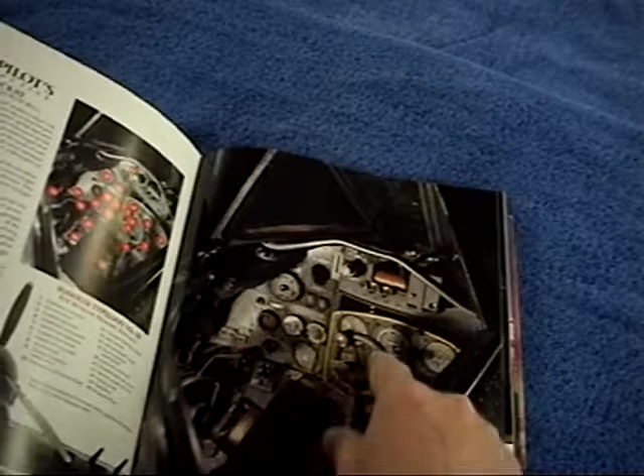The thing that makes modeling fun is knowing that you can do some of this stuff. And here it's telling you what every instrument is, where it is and what it does - a Mosquito, Beaufighter. We did that thing on a Beaufighter not long ago.

The more of this you can see, what I really like is when they'll give you the instruments if you really want to go that extra level, like you're building a scale plane. But we're not, and so we're pretty free.

Here's a Spitfire. Now that's what a war Spitfire looks like, and we'll be able to replicate that pretty simply. It won't be real difficult. Almost everything on here is something we'll be able to get pretty close to.

And notice, in this one, it's not painted blue - it's zinc chromate. So before you can really go ahead and do much, or really do anything, you really have to know what the real item looks like before you can make a model of it, no matter what it is. Knowing what the real thing looks like is always a big step toward getting something that's pretty accurate. And this book really helps.

This is a great book. Now, just another thing, if you notice, this book is pretty well dog-eared and beat up, and it's not a brand new pretty book. Like my tools, in fact, this part's starting to get deteriorated. I'm going to have to get some tape on that.

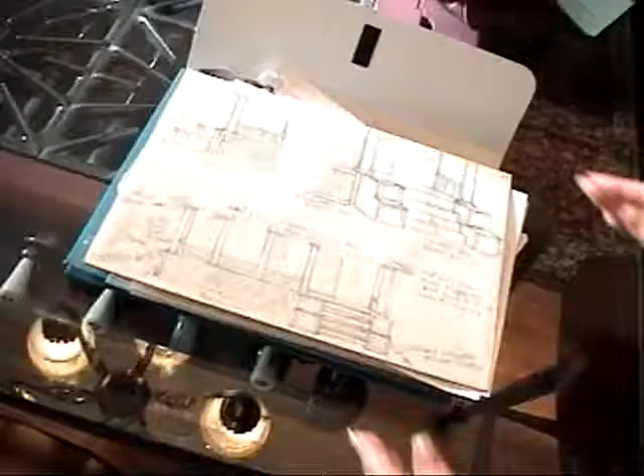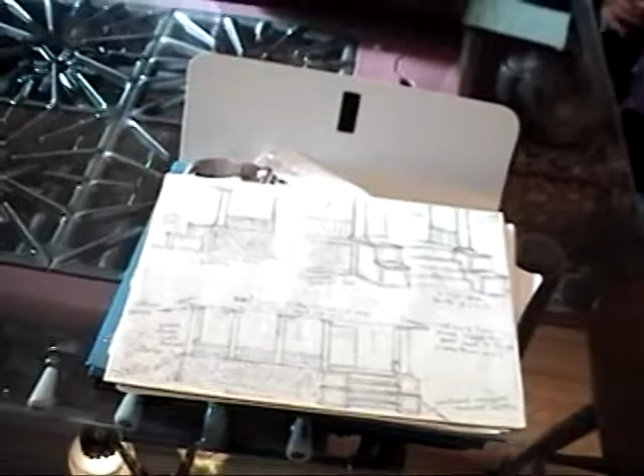The next part of our adventure, we have our neighbor who drew us a sketch of a porch in an attempt, as she remembers it as a girl, but the building inspector in town requires us to have a photograph of the house when it had a porch. And Karen, what did they do today? She called the museum, and the museum has a photo of our house when it had a porch, and she's so happy. We have company, Jay and Will over here.

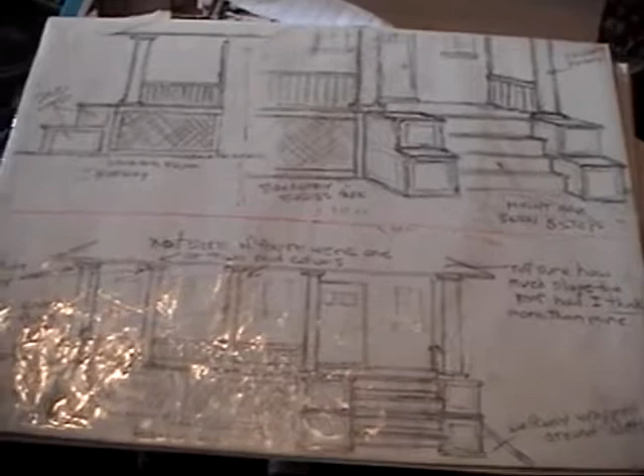We're running out to get a picture of the porch. Is that unbelievable? A moment in stunt history. They have a picture of our house, which is 100 years old, when it had a porch. And we're going to go to the museum and get a copy.

So here we are right in our own town. I never even knew that this existed. This is the Meadowlands Museum. And we're going to go see if we have a picture of our house with the porch on it, which will pretty much grandfather us in and allow us to bypass the variance, save about $2,000 that way.

Look at this sign, you believe this? Pretty cool. I'm excited, we're excited, this makes Karen's day complete. And don't tell her I really wish I was home working on my canopy detail, but this really is an old house.

Wow, look at this stuff, the history of Rutherford, New Jersey. Have you been in our front room, the glass exhibit? No, we've never been here. We've been living in Rutherford for 15 years and you've never been here.

Now what year was this taken? Oh my goodness, I don't know. Probably in the 30s, Jack. You think this was taken in the 30s? Okay, just a minute, Dale is going to be flipping out. We had one of the women in our neighborhood who was a child at this time draw us a sketch. This is exactly what she drew, that was very good.

This is from the archives of the township, this is like an official record. My goodness, you can't keep that. Now, how many pictures do you have? Is this the only one? That's all we need is one, of your house. This is the only picture that exists so far.

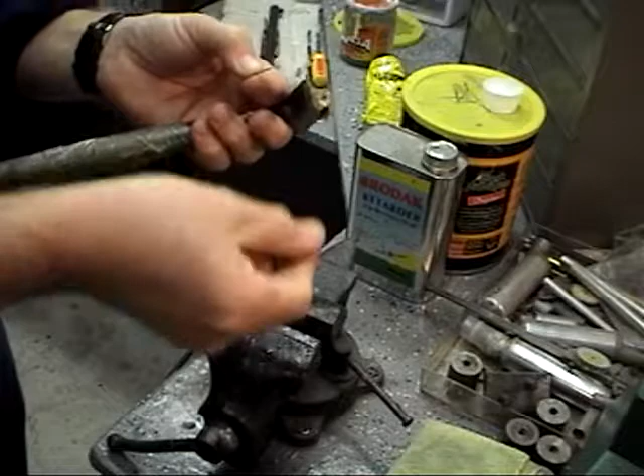A flattened end. Now normally the toggle switch would be up or down, and I'll make up a dozen of these. Not all will come out perfect, but since they're almost no money to make, we can just make as many as we want.

The next thing we need is just a piece of scrap wood, any kind of scrap wood, soft balsa would be best. This is a sheet of Teflon that I got from Dave Midgley. If you didn't have Teflon, you could use wax paper, that's for sure. Now it's important to figure out how we want to make these switches, in neutral, or up or down. So if I decide I want to put the switch down, for instance, down could just be reversed to up.

I have it on an angle, and I think that looks pretty much like what one of these little guys would look like. I can put it in and out an amount that I think is scale. I can make some of these click, click, and some in neutral, and just go right down the list and make each one a little bit different. These are little 0-80 washers, just lay one or two out at a time.

And the idea is if I can get them to look right... I learned a long time ago, use pliers, don't push them in by hand, they still have sharp edges. Make sure you have plenty of washers around, they jump all around. Amazing when you're trying to do something on camera how it works. There we go.

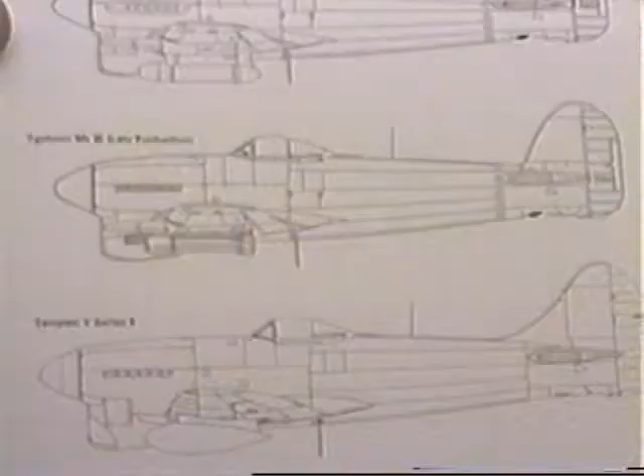Now it's time in our Typhoon model that we're starting to plan what we're going to do for some cockpit detailing. In my case, it's always good if you can, and I've got plenty of Typhoon books, get some idea of what the real Typhoon cockpit or the model that you're making looks like.

The closer you can make it to the real thing, the better, in my estimation. Now we have a lot of videos on doing turtle deck type cockpits, bubble canopies, sliding canopies that open and close. So we have a wide variety of video to check out if you're really wanting to do a super canopy.

One of my goals is to make it as realistic as possible. Make it look like a cockpit, not just a bunch of map makers and map pins and stuff, within the confines of not wanting it too heavy, and not wanting it to take 4.5 years to build.

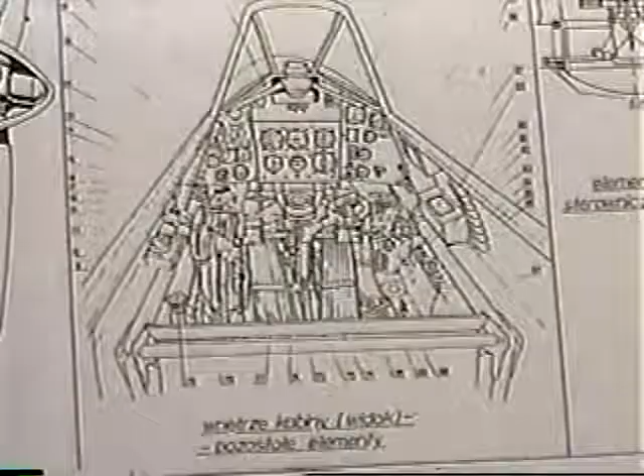It's always handy if you have a schematic or a factory drawing you can rely on. In this case, we have a pretty good rendition of what the instrument panel would look like if we were doing a scale model. It isn't important that we make it exactly scale. What's important is that it looks like a real airplane canopy when we're done.

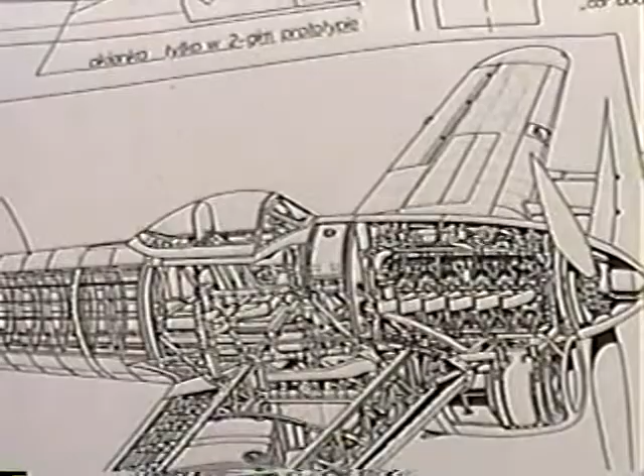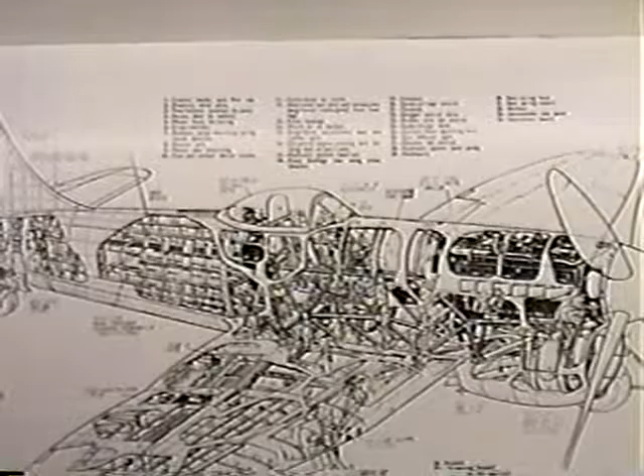Now the Typhoon cockpit canopy is very similar to the Seafire canopy, even in the way it opens. Maybe they even use the same canopy, I don't know. So we have plenty of drawings to work from.

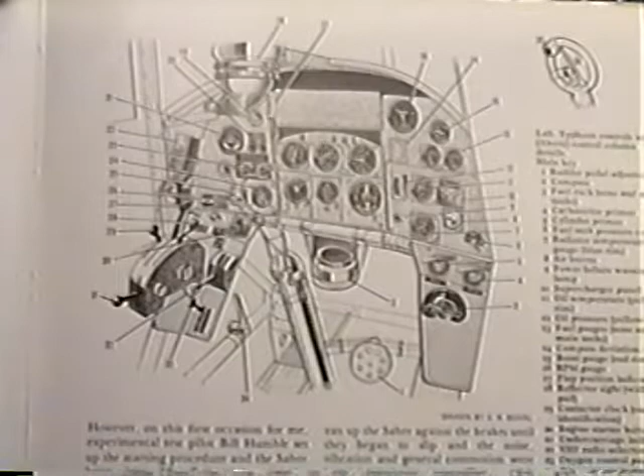Let me go and do a little bit of the history of how this evolved. It's an evolutionary process on my part, doing these ship after ship, time after time. One of the things we have is a lot of models in the shop with various types of canopies. The Strega canopy, very simple, easily duplicatable in maybe 1 or 2 sessions.

Lightweight, and a commercially bought canopy that you can buy from SIG, or I think Brodak handles canopies now too. For many years I used to just paint the canopy on, and that's certainly one of the choices you have.

But if you really like, and I do - this is the Red Baron - on some of the semi-scale planes we've made, we try to make the cockpit, it's not really a scale model, but what we'd like is when you look in, it looks like a scale model. We certainly don't want to make it so complex, cumbersome, or heavy that it has a negative effect on the model in other ways.

Now the Miss Ashley cockpit had one feature that I really thought was pretty inventive - through two little screws inside the plane, you could take the cockpit details out and put them in the next Miss Ashley.

Needless to say, when we did the carbon plane, one of the factors was we were running out of time, so we went with just having carbon fiber. I wanted as much carbon fiber on a plane as possible, and that was one of the ways we achieved it, by just making a carbon fiber cockpit version of the wood fuselage Miss Ashley.

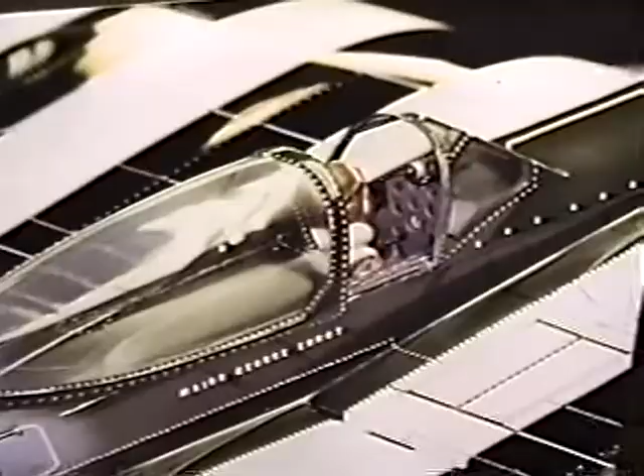In the last video of this series, we were tidying up all the little details, fixing all the little silver flaws, so we're pretty much ready. We want to check out the videos from the previous couple years, check out the models we have in the Spitfire bedroom, and then we'll have a pretty good idea of what we want to do.

We're even going back to the first Valkyrie, and this was in the early 60s. This is the one I finished. I refinished a plane that was Harold's original Valkyrie. I flew this at I think the '61 Nats, but I remember thinking, wow, this was the first plane I ever made that had a real cockpit and pilot and some instruments, and I really was excited about that possibility.

And I know Ken Tyson has a really nice pilot in his Strega. I think Tommy Looper did it, but I'm not sure. Just a nice little detail touch, and I certainly think it's worth the effort if you have the time and inclination to do it.

Joe Adamisin in his Spitfire, this was the '96 Spitfire, he had a shrunken down Stunt News in the cockpit. I don't think you can see it here. As if the pilot were reading Stunt News, and it was the Stunt News that had his picture on the cover, I think it had the two Spitfires on the cover, I'm not sure. But I thought that was kind of a cute touch, and I'm always looking for little things like that to set the model apart.

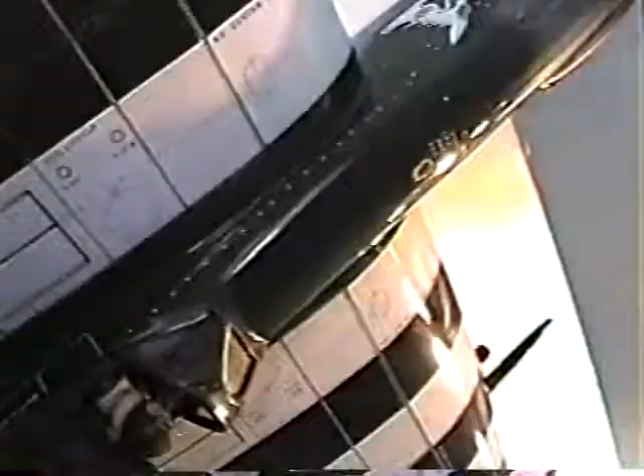What I thought was just my most unique effort, the idea I got from Keith Trostle, was making the canopy open and shut on rails. It's all available on other tapes for somebody that really would like to push it to the limit, or just do an amount that would make your models stand apart in a crowd. And the thing that's nice is every one of these models has won the Concours Award, and I don't know if that had anything to do with it, but it couldn't have hurt.

So let's get down there and start working on our canopy details.

Basically, the reason we have a little extra time, we are in snowbound mode. We've had the two biggest storms in the last 5 years here. We've been shoveling every day, and when I get done shoveling, there's nothing more fun than working on cockpit details.

Of course, it's always handy to have a nice library of books that you can refer to for ideas, pictures, things that'll be of some value. I always save all the books, and I want to thank everybody that's contributed literature into my library.

All summer we feed the fish in this fish pond, and right now, believe me, they're predicting snow for the next 3 days. We may get this cockpit detail done by the time it stops snowing.

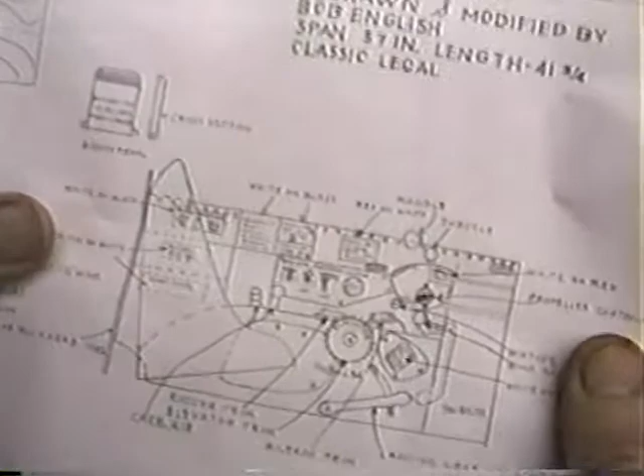The next thing I want to make is a trim wheel, because it's very easy to make, and it sets out very well in a cockpit. I've got some extra instruments here. Believe it or not, nobody used up all the old instruments. I can't believe it. Anyway, that's going to be the elevator trim wheel, and I'll make that next.

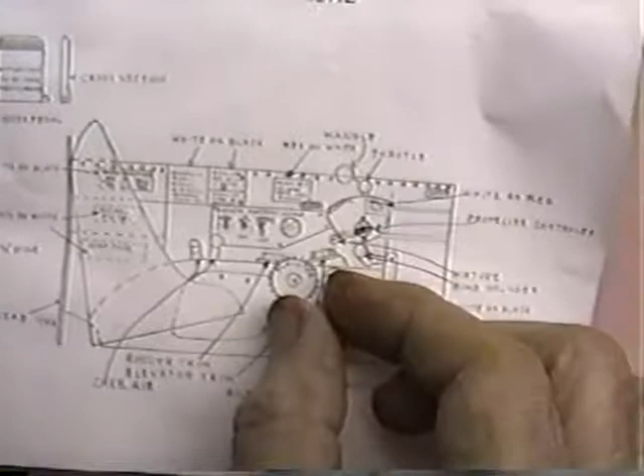Laminate together 5 pieces of 64th plywood. It's good, you can use up little scraps of plywood. I try to, and even though it's not really important, I laminate them in all different grain angles, then trace out the shape of the trim wheel.

Once they're all glued together, you can just take my circle template, figure out what diameter we want to make this. That's a little big.

Now you can see I just have the little wheel. I need to dress this off just a little bit. Then I'm going to take a parting wheel and put the trim notches in it. It's a very easy part to make, and it really does dress up the cockpit because it's a focal point, and it's very prototypical. Typhoon has one, Spitfire has one, Mustang has one. We just happen to have those nice P-51 drawings available.

I need to be able to hold these little detail parts, so what I do is I just CA it to a part. Now I can hold this in my fingers while I put the serrations on it, with a parting wheel, and I just eyeball it up. What I do, I start the notches first, make sure I have them evenly spaced, and then just go ahead and make them a little bit deeper. Now what I'm doing, I'm putting a little bit of a recess in the middle of this.

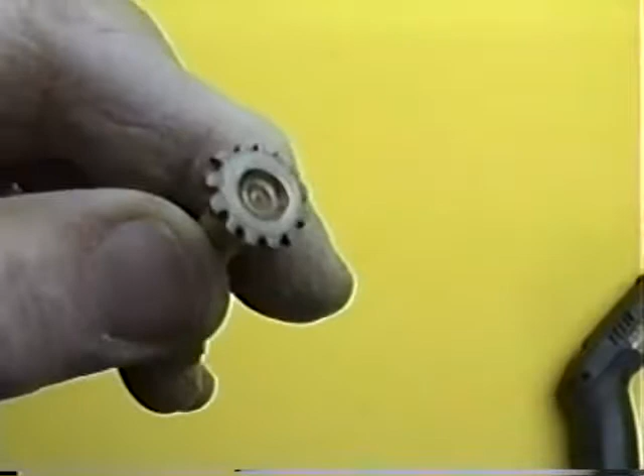By the way, this has been from Al Raby's plans and redrawn by Bob English. This is where we're getting some of our ideas.

Little time left while that's drying. Roughly what I'm going to do is grind a hole first, then rough cut this and grind the rest in. There's no other easy way I know how to do this, and the material with the grains all in different directions makes for a nice solid part. This is of course the yoke, very similar to what the real yoke looks like. That's step one, just rough it out. We're not following any real plan here.

Now I'll go and overcut this with the saw, and the rest of it I just need to dress off. Really, in essence, we're carving it. It just takes a little time to shape this.

A nail file makes a good sanding stick here. Of course it's delicate, and for almost sure we're going to break it at some point and have to CA it. I'm going to radius it all off, and this is what the yoke in a Typhoon really looks like. They call it a shovel yoke. A couple of coats of thin and thick CA, I'll build this up to have a nice prototypical finish, and then it'll be ready to paint. Once it dries a little bit, I'll just sand this down.

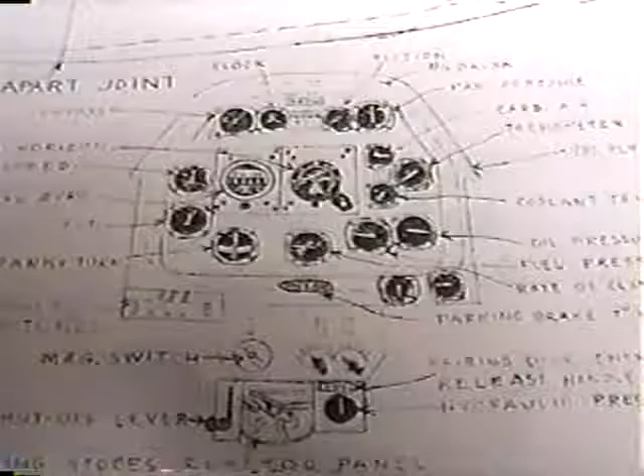To figure out how we're going to make up this dashboard, I started by laminating up some 16th balsa. See, the grain is going that way on one piece, that way on the other piece. Drilled some holes similar to the way we did it, just made a rough random instrument layout. This will be the base of our dashboard, whatever it is you want to call it, and this will fit right in here. I'm just trying to rough this out right now.

The next step, I want to take some thick CA - and I want to be careful because it'll dry slow - to get a good bond on this. I'm going to glue it right to a piece of 600 wet and dry sandpaper. The reason for this is it gives a texture, and a real dashboard would have some kind of anti-glare panel. This would be a good simulation of that, I hope.

Sanding these parts, it's easiest if you just sand it away from the sandpaper. When you do it that way, I don't know, sandpaper tends to peel away at the corners. So I want to get the edge on this relatively straight. Then I want to get in there and cut the holes out with a brand new blade.

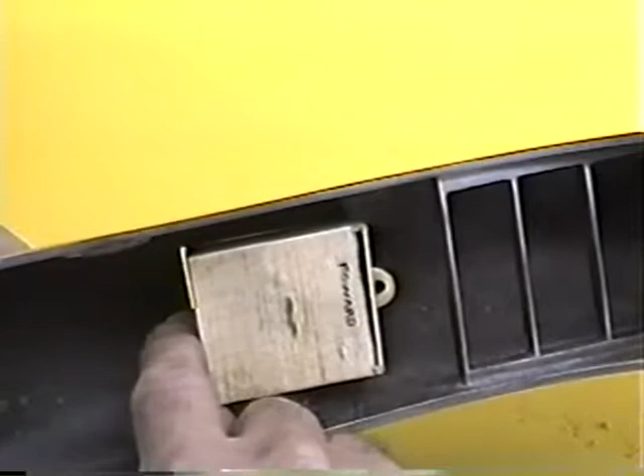Now this would help if you were making a plane with a push rod. A lot of times a push rod's in the way, like on a Miss Ashley, for instance. So this can allow you to set this at any exact angle you want, front to back, side to side. When you're happy with it, you can just tack that, and when you take that out, the tabs will be attached. Once they're pulled apart, you can put a permanent glue seam here and maybe even a little reinforcement.

Take these bolts out. I'll have my little mounts temporarily set in place.

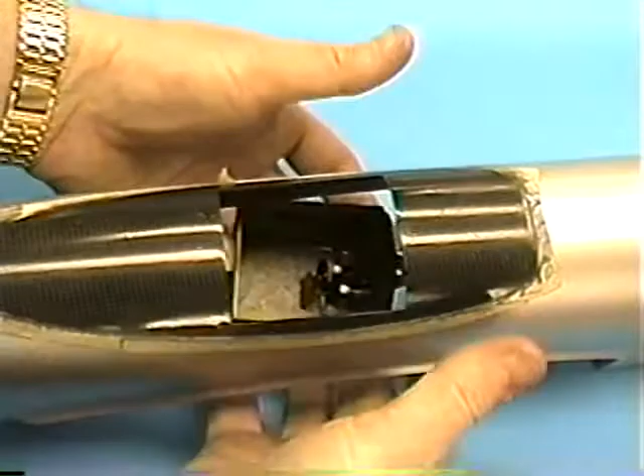That's why it's always good to put a little drop of oil on those bolts. And that comes right out. Now the tabs are set in place, so I can make a permanent glue seam. Maybe even put a little reinforcement here. I'm wondering if I should do that.

I just ground these tabs down, made this a permanent glue seam here. We'll paint this all later. What this is going to allow me to do now is set the seat height to the most attractive angle, and the seat will just get glued to the back. I don't need to even glue it to the floor of this.

Anyway, I hope you're getting some good ideas for this for your next plane. I find this to be one of the more enjoyable parts of building a plane.

Piece of 64th plywood. I'm going to make the visor, which goes on top of the panel.

Now what I like about the video, this is the Seafire video where we're putting a box of pizza in the cockpit with the pilot. Anyway, I thought that was one of my finest hours, the Seafire cockpit. Two concours wins, by the way. I'm sure the cockpit had something to do with that.

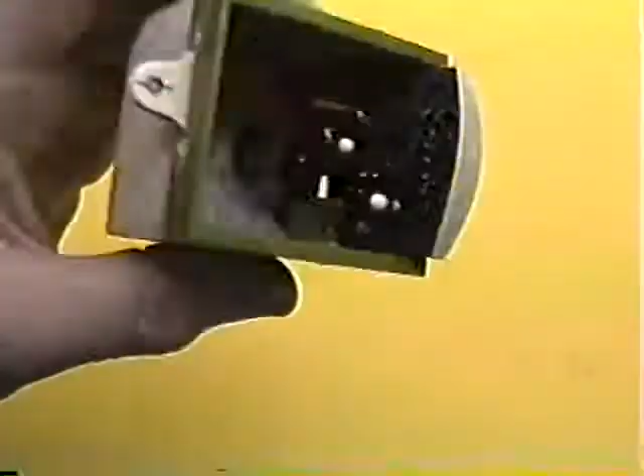This is the little sun visor. It's similar to how the real plane is. A little bit of an edge, and we'll do that finishing when we go to paint that. So far so good though.

The next thing I want to do is glue the seat in, get the height that I want, and glue it right to the back.

Making up one more piece, which will probably be the last piece I get to do today. This is the rib that goes behind the pilot's head.

I don't want to start making this too elaborate. But I really do like the fact that when people look in there, they say, 'Oh, how'd you do that?' Always nice. And of course, maybe the last thing tonight would be to make the brace that goes back here.

Now remember, that can't attach. I have to leave that just pressed up against that.

These parts are always easier to paint before you glue them in. Once the second coat's starting to dry, I'll do that stipple thing, but there's a little too much paint on here to do it right now. It's just to give it a rough, dull finish. The talc keeps it dull, the stippling keeps it a little rough.

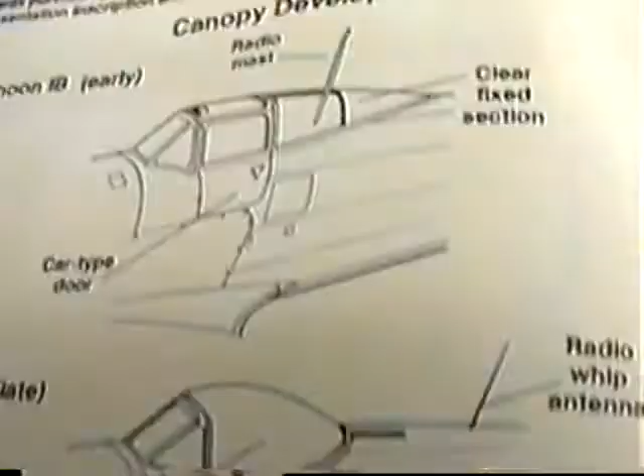What's nice about having all these books, and this is the model we're portraying, is we're going to get all these outlines on the outside of the cockpit with tape, then flip it over and hand paint the inside.

Okay, all the tape is on. Now we're going to flip this over and, just with a brush, very carefully paint one thin layer of the zinc chromate on the inside.

If you weren't comfortable doing this, you could mask it off. But because this is a part that I just want to go right up to the edge of the red, I use this piece.

Look at those steady hands. Years of art training. I'll tell you, what a guy.

Now, I don't want to get any dope in that flat edge that we're going to use to glue it down, because we're only going to have a very small glue footprint into the carbon. We don't have the ability to make a trough there.

And everything else is drying up. I've walked around many times, looked for some more details, looked through my books again.

I like the little thermos bottle. Anytime you're in a dollhouse store, you should always look around for something and just put it in a box for all the stuff you think you're going to use in the future for cockpit detailing. And you always have to make the decision when you're making a model just how much time, energy and effort you want to put into it.

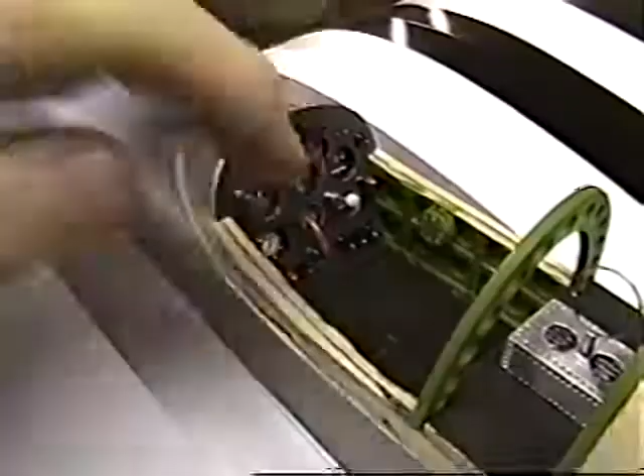Our little brake lever, the epoxy dried. Doing this with dyed epoxy is really a nice way to get a nice finish on it - it's almost impossible to get nice finishes on these little parts otherwise. This is a good little tip though. That little lever in there kind of worked out the way I wanted to.

More little detail I want to make of it. One of the tricks is there's not much better material that I know of than 64th plywood when it's laminated. What I want to do is make a little schematic of the shape I want, oversized, then cut out 4 or 5 laminations, crossing the grain, which gives you nice material to work in little details with. It needs almost no pre-finishing, usually works well right away.

You can see the rivets on the inside of the canopy. I really like that effect. The nice thing about doing this with any canopy work is you can do as much detailing as you want, or if you choose, you could just paint the canopy on, or in some cases people don't even put a canopy on.

Now I can start working my sanding operation in here. Obviously, maybe I'll even put a piece of tin foil over here or something to protect that. But I need to sand this, get this blend real nice, and decide just how I'm going to seal that edge up. I know this will be one place.